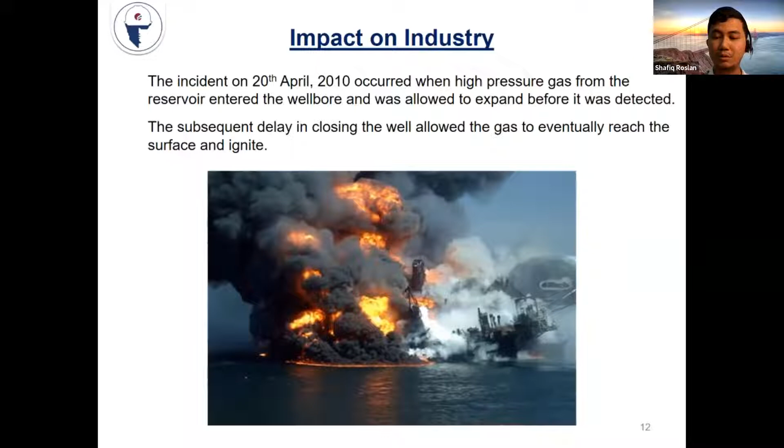So the impact of this incident, the blowout of this Deepwater Horizon well, caused loss of 11 lives, destruction of the drilling unit itself, and also uncontrolled flow of hydrocarbon into the sea. So it happened around 3 months.

So we took quite a lot of time because of the contingency plan. It needed to drill a relief well, right? So that is not a good contingency plan. As we see over here, it took around 3 months.

And it costs around 4.9 million barrels of crude spilled to the sea. So it's about a week of Malaysia's total crude production, which is about 700,000 barrels.

So it affected the name of the company itself, the operating company, and the contractor, the rig owner, as well as impacting society, for example fishermen, and the tourism industry, because the oil was now all over the beach.

So this is what happened after this incident. This is the consequence. That's why we have this kind of subject. We want to talk about well intervention, and actually what we can offer you to prevent all of this from happening.

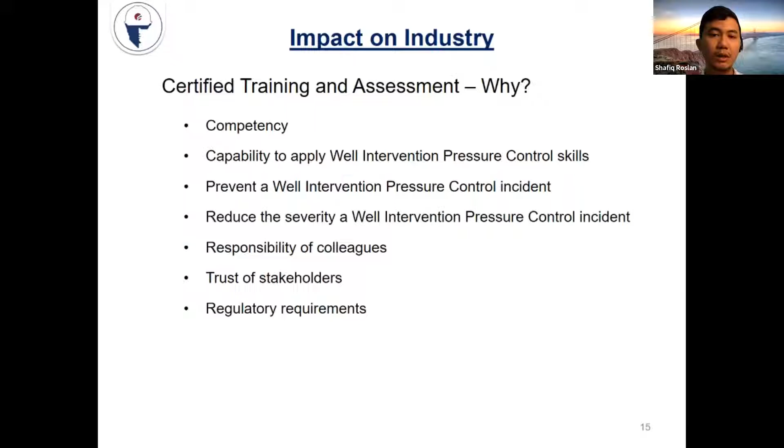Let's say if we pass this course, so we know that we can rely on him, and he also can share with the colleagues offshore, and also build trust of the stakeholders and compliance with the regulatory requirement. So let's say if there's an incident, a well control event happens, it can impact the personnel.

Loss of life, right? You can see from the previous incident at the Deepwater Horizon rig, it cost about 11 lives, injury, and also loss of employment.

So for asset, we also can have asset damage, or a total loss, disaster. Environment impact, and in the heart of our operation, we need to either suspend or just abandon the job. The name of the company itself, the name of the staff, and also the people. So this is again, we already talked about what will be the consequence.

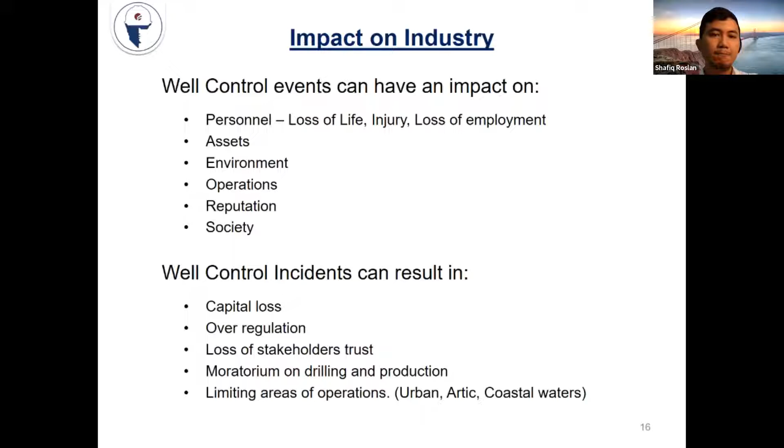So this IWCF certification - actually IWCF is an independent body. It focuses on developing and administering well control training and well intervention pressure control training, the assessment, and also certification program for the E&P sector around the world.

Following from the incident, there is a report produced by the IOGP, International Oil and Gas Producer. In report number 476, there is an introduction of two programs.

So drilling well control - this is specifically in drilling operation, exploration drilling, development drilling. And then the second one is well intervention pressure control. This is during completion, well intervention, or abandonment. Sometimes we use this conveyance.

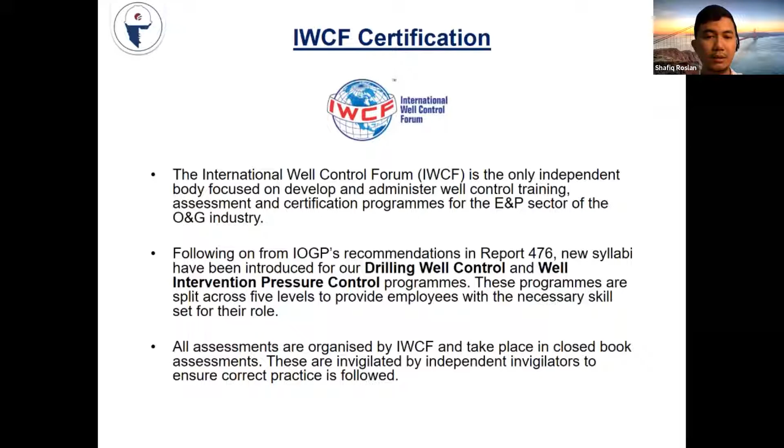This program is split into 5 levels, from level 1 until level 5, to provide employees, staff, people working within this industry. So all the assessment will be organized by the IWCF, and will take place as a closed book assessment, held in a center approved by IWCF.

So as per the IOGP report, this is the level guidance chart. There are 5 levels of the well intervention pressure control program.

Level 1 will be the introduction level - it will create awareness. So what's the training purpose? You want to create awareness of the process and terminology of the well cycle.

So I recommend, if you haven't done this, you can just log into this portal. Later I will share that link. It's actually a free course, so you can have like...

an introduction of what the process is in well operation, what the importance of well control and intervention pressure control is, the life of the well cycle, how we can contain an incident, the ERP, and the role and responsibility of each personnel. Basically we have a few modules to complete, and you also have an assessment - you need to pass around 70%, that will be the minimum marks.

All free. So this is good for a roustabout, maybe even a fresh graduate, crane operator, deck crew that are not really related to working with well control equipment or pressurized control equipment.

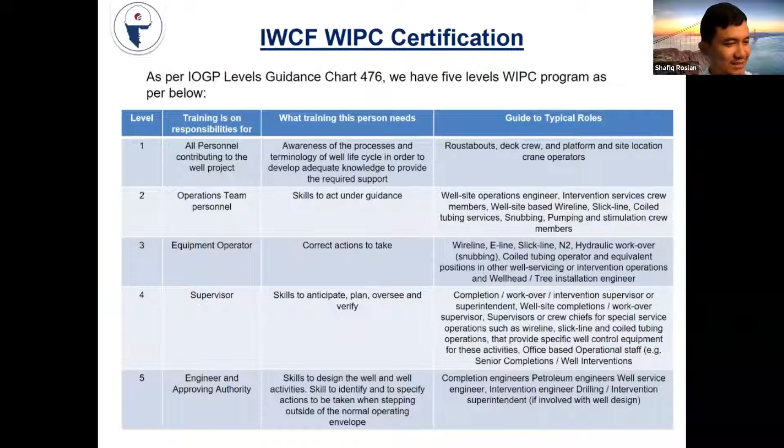Okay guys, any question about this slide? Are you all good? Can all of you hear me? All right, okay, so if no, I move to the next slide.

So why this IWCF Well Intervention Pressure Control Certification? Because this certification is a regulatory requirement from the operating company and also the oil field service company. The operating company mandates this as a requirement, so the service company needs to follow the requirement of the client - for example, if Petronas, Shell, or JX Nippon put this as a requirement inside the contract, the service company needs to follow that requirement. The equipment operator needs to have this certification.

The supervisors of the service company as well as the operating company also need to have this certification. This is a requirement to run the job or even for promotion. Let's say initially you are the operator assistant, and after a few years you have sufficient experience and your management team has confidence in you that you can run the job as an operator. So they want to promote you, but in order to get promoted, you need to have this certification. That is one example.

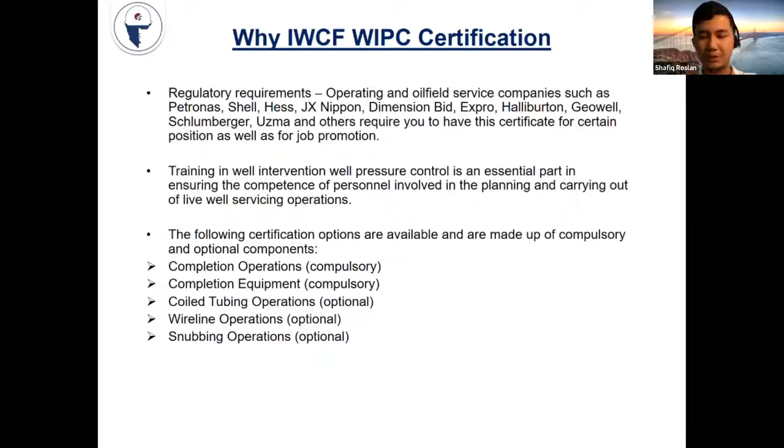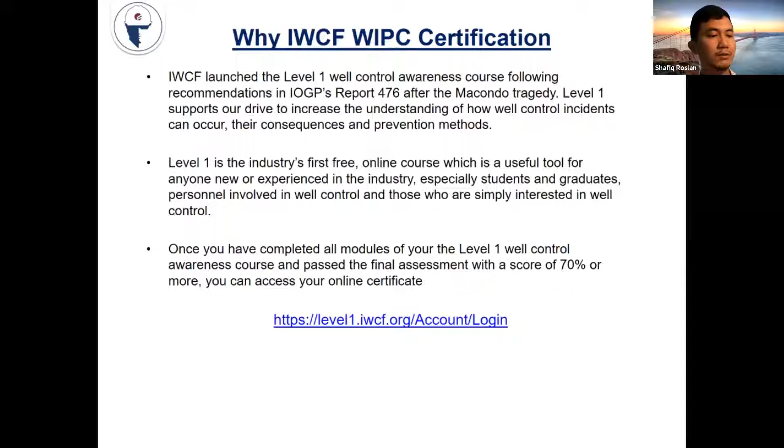So this is the link for level 1. If you haven't done this before, you can have a look, log in to this portal, and try it. This is the introduction of level 1, well control and well intervention pressure control, and you will get the certificate after you have completed this assessment in level 1.

So now we move to the next subject, introduction to well intervention. Why do we actually do well intervention? What is the purpose? Because there will be a purpose.

How can we improve the production? First we need to identify the issue, diagnose what the issue with the well is - whether it's due to an integrity problem, a mechanical problem, an obstruction, or maybe a change in reservoir behavior. Based on this diagnosis, we can overcome the problem we found.

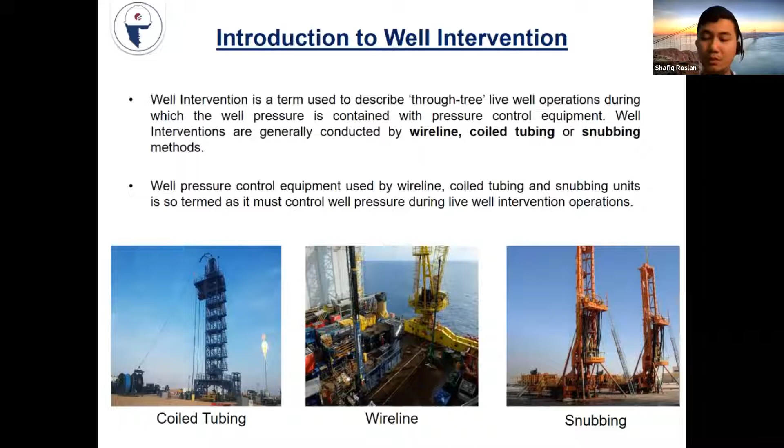Basically, wireline operation refers to the use of slick line. Later we will see the types of wire, slick line or braided wire, or even single conductor or multi-conductor, used as conveyance for the wireline operation to lower down equipment, either logging tools, mechanical devices, or measuring devices into the well.

You can see here two units: one is an E-line unit belonging to Schlumberger, and the right one is a slickline unit. This is at offshore Terengganu.

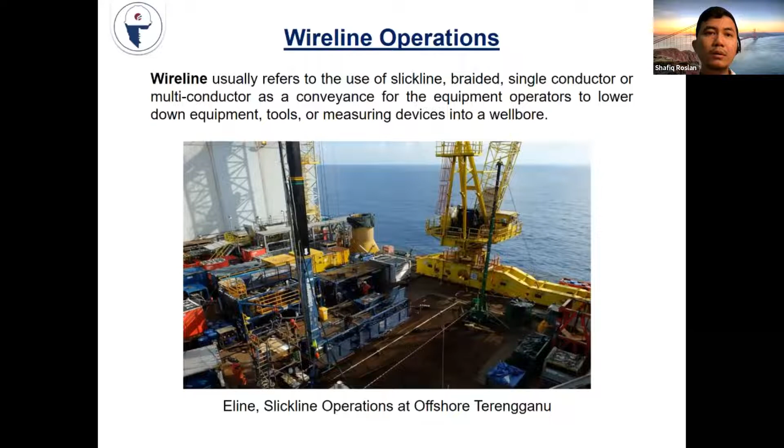So for wireline operation, I will share with you what is a wireline operation. This is a slick line operation at Netherlands, I believe. I hope it will give you a better understanding of wireline operation, because this is an introduction course, so I hope it gives you better understanding about wireline. I will share this.

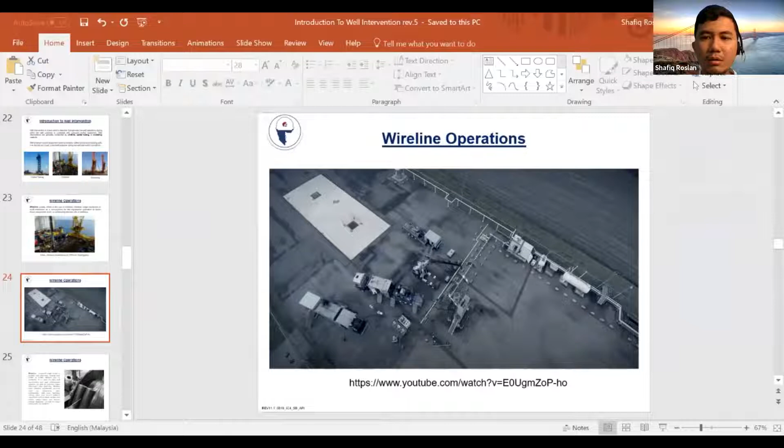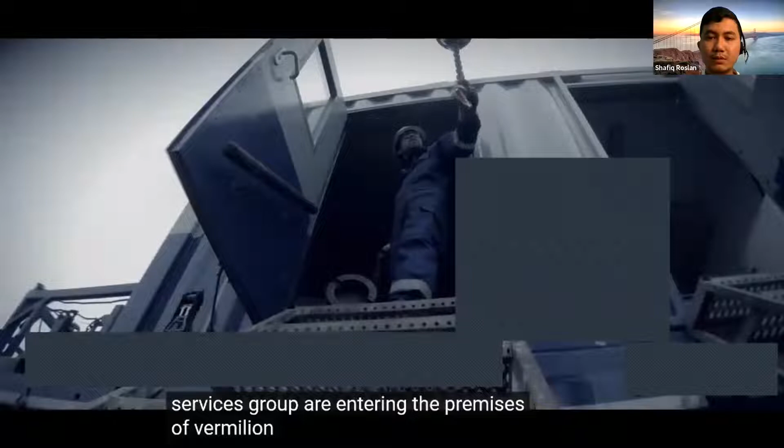It's early in the morning, somewhere in the northern part of the Netherlands. Two trucks and four crew members of the Well Services Group are entering the premises of Vermilion, a gas and oil company operating worldwide. They are here for a reason: gas production dropped down severely and nobody really knows what the problem is. That's why they are here. Just an ordinary day for some extraordinary people.

Just want to check, can you hear the sound? Daniel, can you hear the sound? Yep, yeah, loud and clear. Thanks, here is the story. Yep, okay, bye.

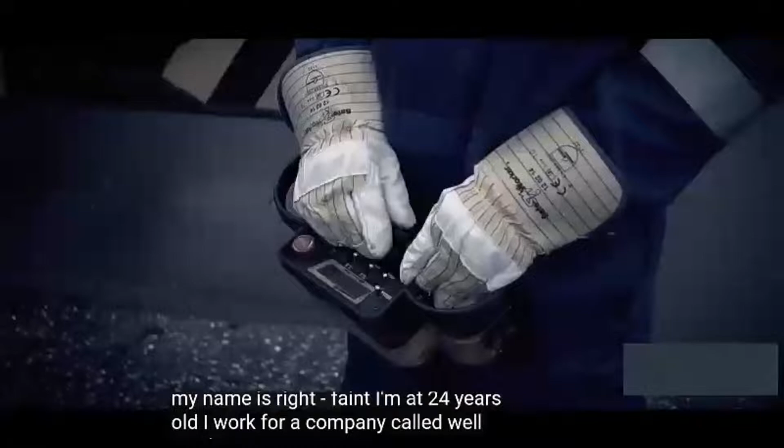My name is Fain, I'm 24 years old. I work for a company called Well Services Group. We're active in the oil and gas industry. We do clean-outs in wells. We do downhole services.

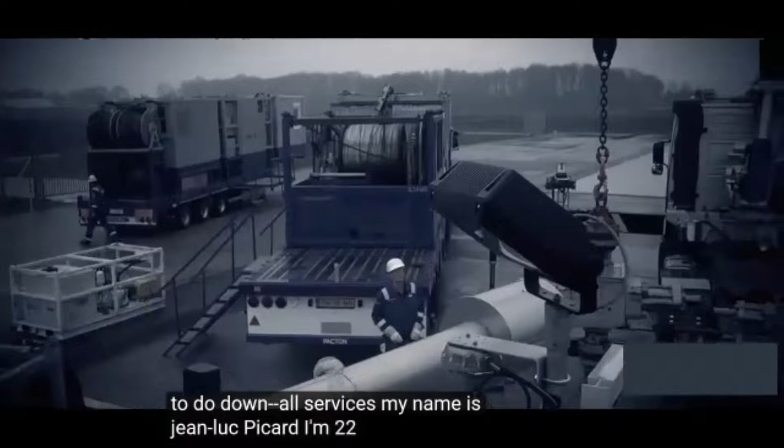My name is Sander de Kaat, I'm 22. On this job I'm a slickline supervisor. We have slickline, coil tubing, pipeline services.

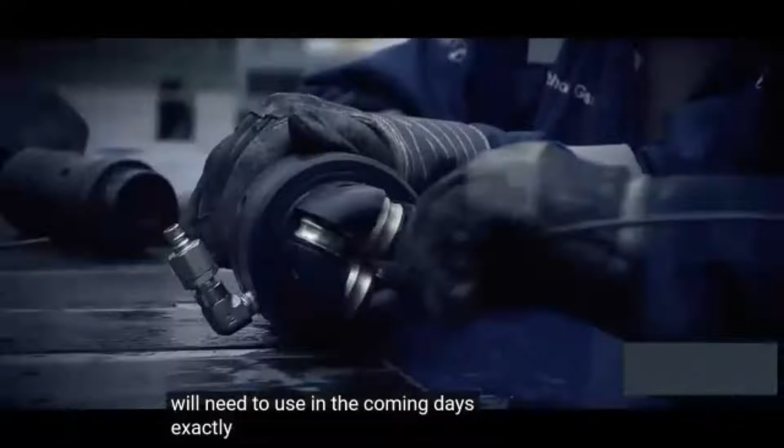Before they can start with the first part of the process, slick lining, they have to position all the equipment they will need to use in the coming days exactly in the right position. This so-called rigging is the responsibility of Roy Terveen, who is supervising this whole delicate operation. Bring the equipment exactly the way it should be, because you want to have a visual on almost everything, so that you can have a big overview, like a helicopter view.

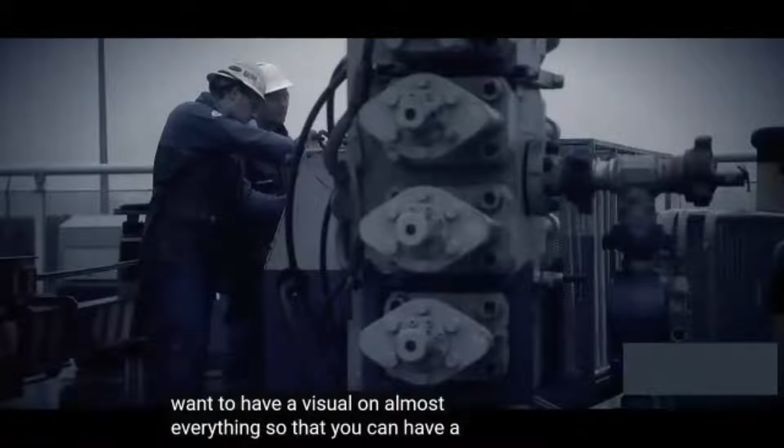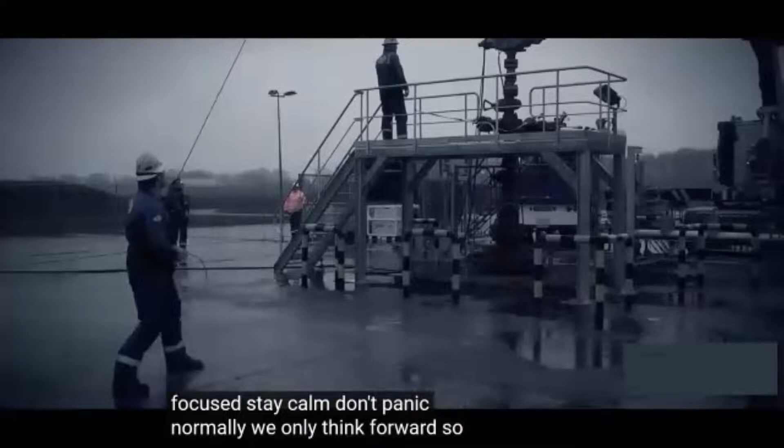The key to solving problems is always to stay focused, stay calm, don't panic. Normally we only think forward. So we see a problem, we're going to find out what it is, we're going to solve it as quick as possible for the client, and then we're going to continue with the job. This job is, in my opinion, all about teamwork. If you don't do it as a team, I don't think the job's going to happen at all.

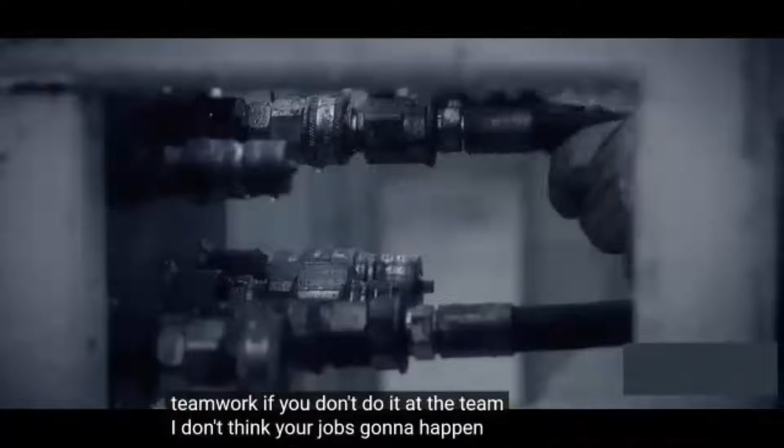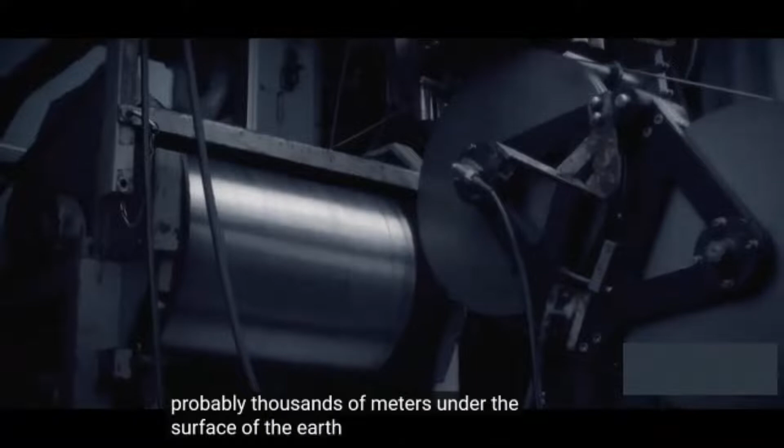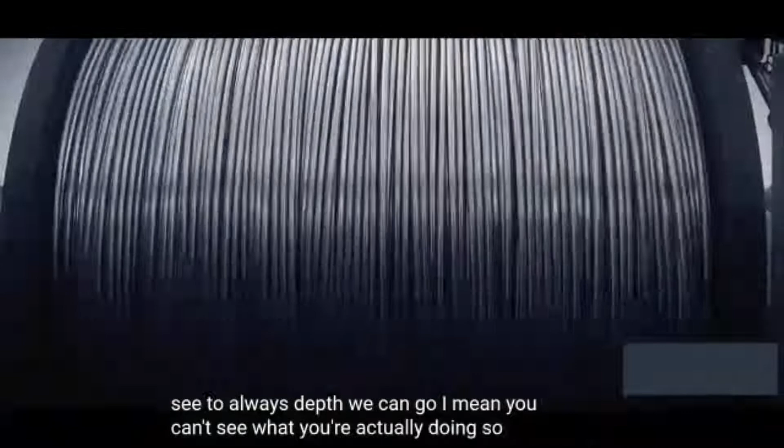Now the crew can start with the slickline to see if the problem causing the setback in production can be found. Keep in mind that this problem is probably thousands of meters under the surface of the Earth. First thing we do is pulling the safety valve. After that we go in with slickline with a drift run to see till which depth we can go. You can't see what you're actually doing, so you're always looking at your depths and your weights. It's all blind. The only thing you see is weight and depth.

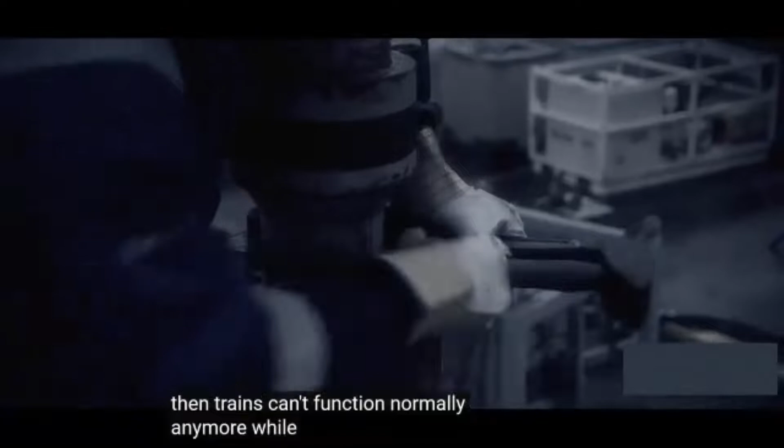Besides tackling unforeseen obstacles and staying focused on the job, there is another challenge coming up: the weather. You don't want any time loss on this job. The weather can have a big influence on it, because if you have too much wind, then cranes can't function normally anymore. We've got wind meters, and as soon as the wind picks up above a certain amount, we just have to quit, you have to stop working.

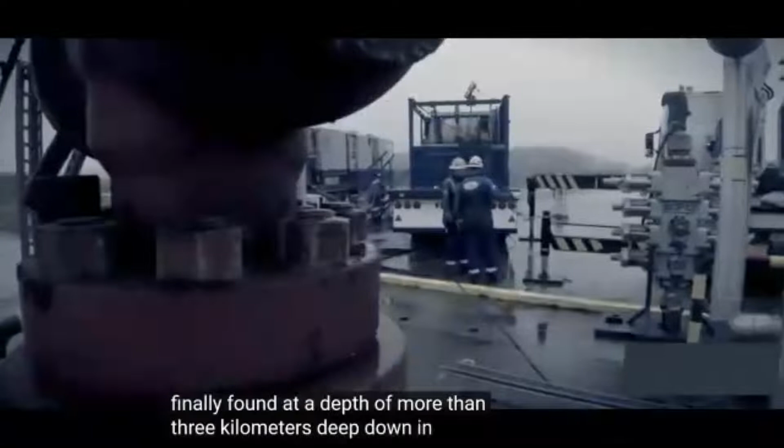Conquering wind and rain, the problem is finally found at a depth of more than 3 kilometers deep down in the ground. It's salt. The salt builds up on the side of the tubing, and that can create a problem with your production flow. The production fell back like 30%, so now it's up to us to clean it out and see if we can get it back up.

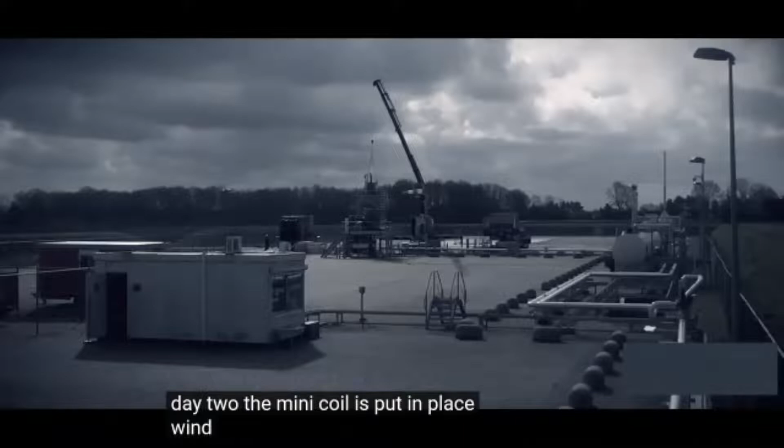Day 2. The mini coil is put in place. Wind and rain have passed, which is a good thing because the crew is on a tight schedule. The salt problem needs to be solved, and it needs to be solved today.

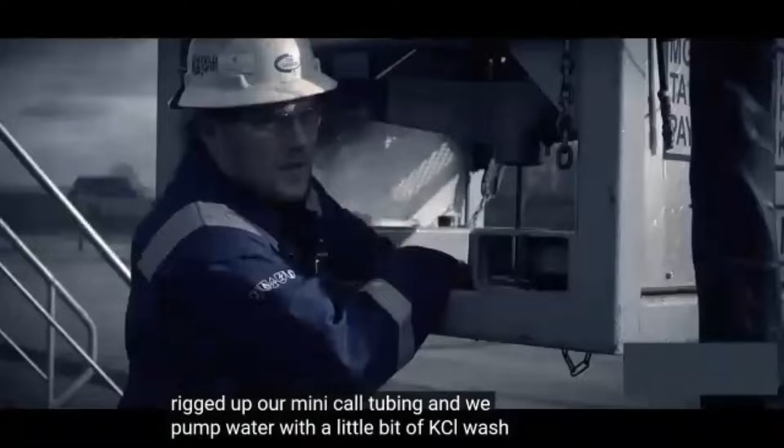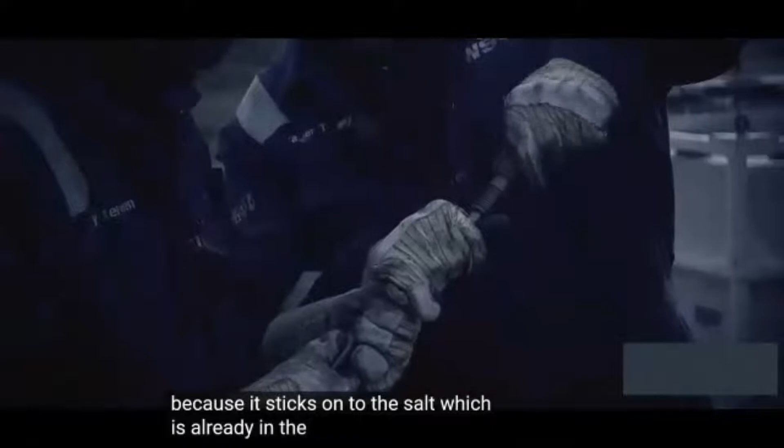More than ever, time is money. As soon as everything's on the right spot and the equipment's ready to go, we rig up our mini coil tubing. And we pump water with a little bit of KCl to wash away the salt plug. KCl water, that's a mixture of salt and water. It's easier to remove the salt in that case because it sticks onto the salt which is already in the water. The guys are working hard, keeping a constant eye on each other and trusting one another.

This is teamwork at its best, and it works slowly as the gas production is picking up. The salt problem has been solved, the production is back up to speed, so the client is happy.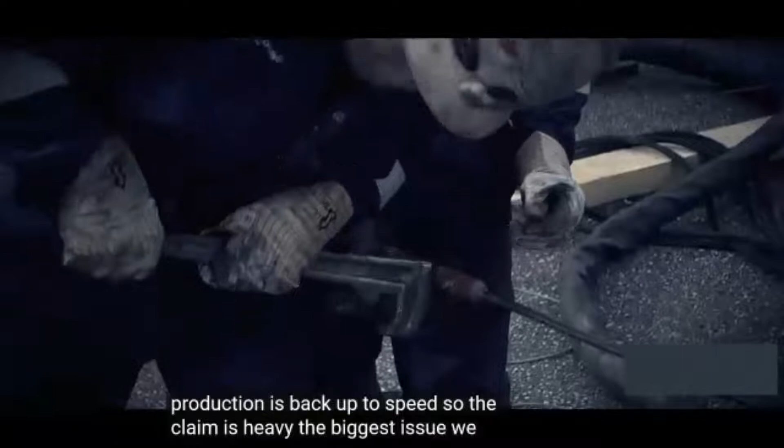The biggest issue we had was the weather, the rain. Rain is always a bummer, but it's part of the job. Every well is different. Now we're doing a salt wash, but next year it can be a completely different problem. So every day you go in and you never know what you can expect. And that's what I also like about my job, the challenge. The environment, working with the crews, everything together. It's the total picture, I think.

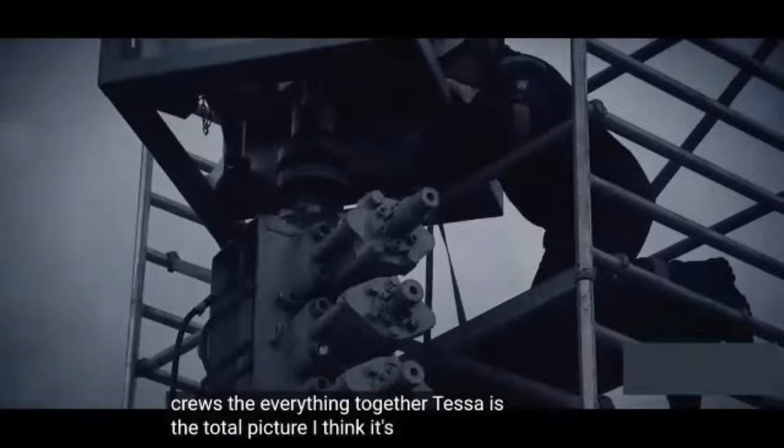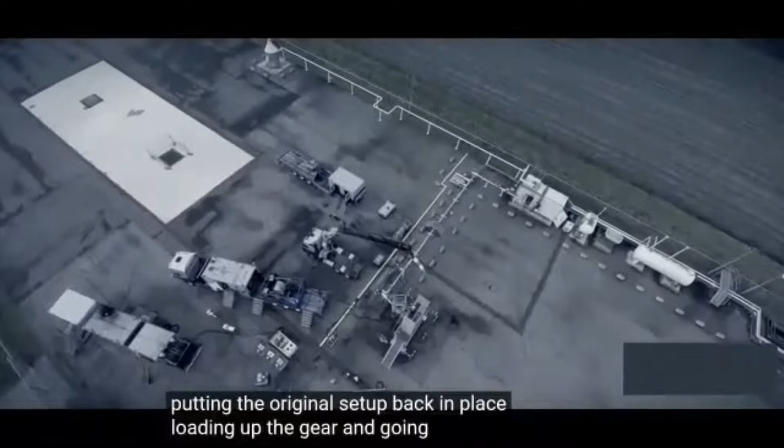Now all that is left is putting the original setup back in place, loading up the gear and going back home to prepare for another challenge on another location. But for now, a job well done.

Okay, I will share back my slide. Hold a moment. Okay, this one. Right, control. Okay, good.

So basically that is the slickline operation, right? So slickline operation is actually the initial conveyance, the early method of how this wireline operation is done, and then it evolved into similar wireline operations, but currently we have E-line technology. So inside this wire you have a conductor to transmit the signal. So we have real-time communication between surface and downhole.

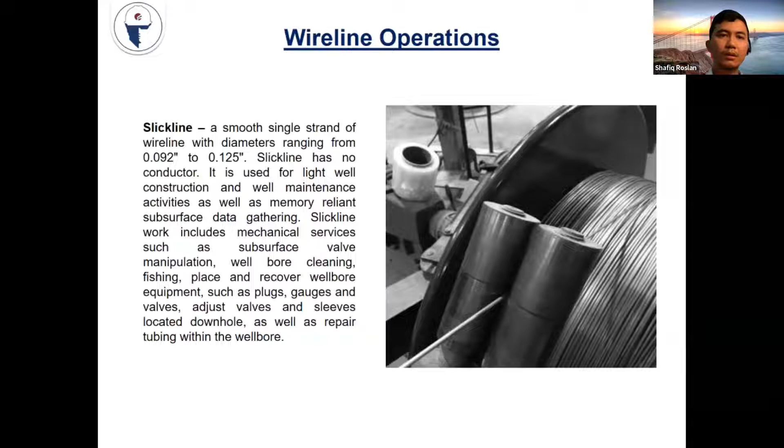Next, we talk about braided line. Braided line is a bigger wire, within a similar group with the electric wire - braided line and E-line. Because of the size, the PCE type will be similar. It's a strong braided wire line of various sizes used to retrieve tools heavier than slick line can handle. Because of the size being bigger, it has relatively higher strength. It's being used for heavy duty fishing jobs, and also for wellbore cleaning works.

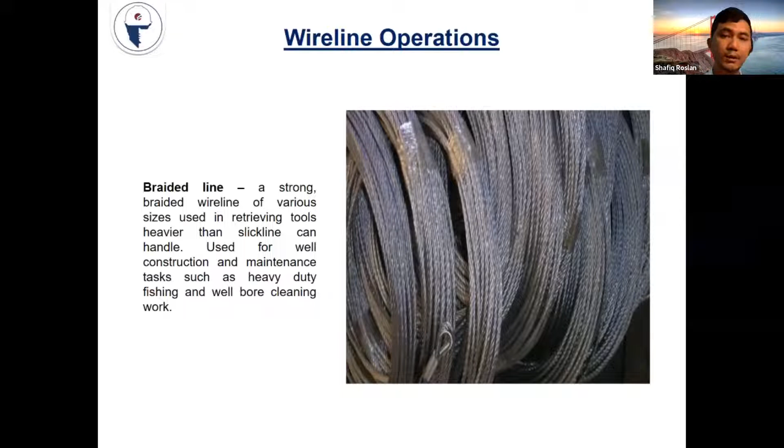Next, we move to the electric line. Electric line consists of single conductor or multi-conductor cable inside the wire. This conductor is used to transmit either power or data from the downhole, bottom hole, to the surface in real time. For single mono cable conductor, it's used for production services in cased wells because of their small cross-section area, so it's more suitable for pressure operation. Multi-conductor cable is used primarily in open hole as well as cased hole application. So basically there are three types here: slick line wire, braided wire, and electric line.

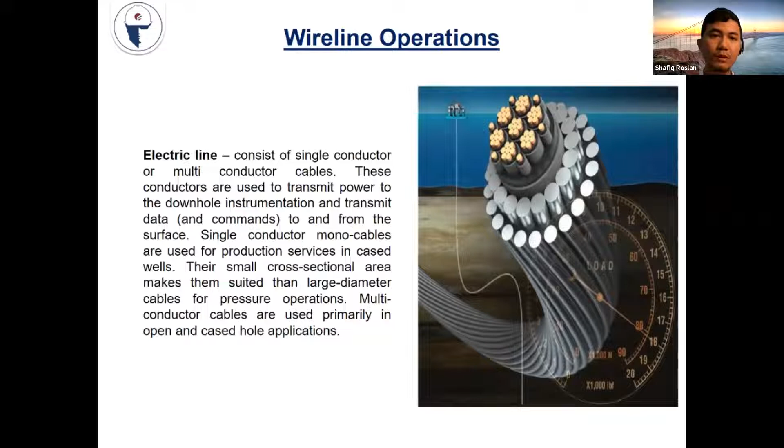So what actually can we do with wireline operation? We can basically do the mechanical completion, intervention or maintenance. For example, if our tubing retrievable TRSV safety valve fails, how can we fix that? By using wireline, slick line. For example, we can set the lock open tool in the tubing retrievable, and we can set the insert valve as a replacement for this failed downhole safety valve.

We can also do perforation, production logging, because if you want to know the behavior of our reservoir - for the interpretation from the engineering side, for example petrophysicists, reservoir engineers, they need to have this data, which they can get during logging activities. So we can do that by wireline.

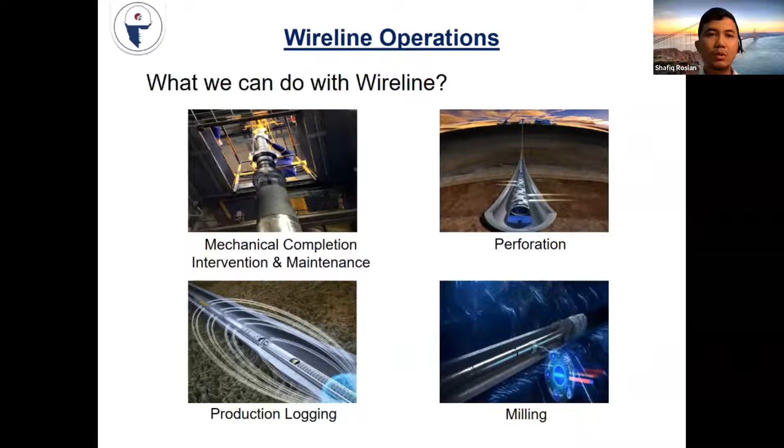And let's say if there's an obstruction, we can use wireline to mill that obstruction. For E-line, we can provide extra power to operate the motor, and also do logging to check the integrity of the well, for example cement evaluation - what's the current condition of this cement bond. Also pipe recovery - let's say we have a stuck pipe, so we can cut the pipe using this wireline conveyance, running the jet cutter RCT tool.

We use that tool to cut the stuck pipe to recover the free part of this pipe. We can also use this wireline for fishing - let's say if there's a loss of tool inside the well, we can grab it back by using wireline. We have a few selection types of fishing tools you can choose based on the application, so the fisherman will determine that, and we can fish using wireline conveyance. Also leak detection tools - this is more on the integrity of our well.

So this is an example - not all examples that I can share with you of what activities we can do with wireline. Basically, this is an introduction of the PCE equipment with wireline. So in the course for level 3 and level 4, you will review this together with the instructor in detail - what is the PCE equipment, and let's say if there's a scenario, they give you a scenario of what action you need to take.

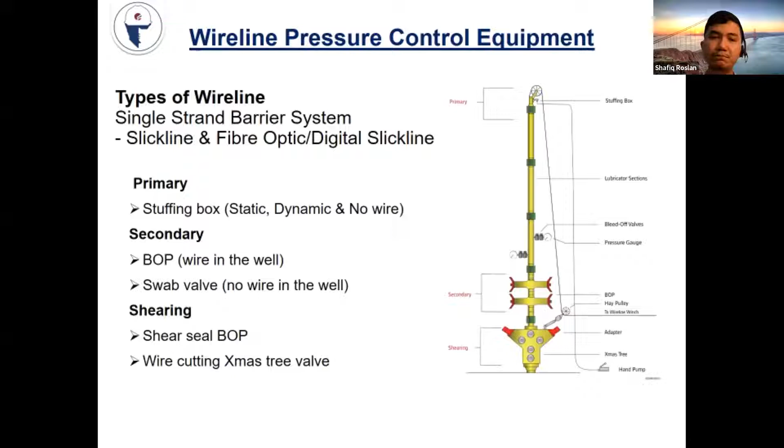For the multi-strand barrier system, this one is for braided and electric line. That's why I introduced you to the type of wire first before we move to this. Because the size is slightly bigger compared to the slick line, the PCE equipment, the pressure control equipment, will also be slightly different.

If there is static wire or dynamic, the wire is moving. If there is no wire, the prime barrier will be for static hydraulic pack off. If the wire is not moving versus if the wire is moving, the grease injection head over here will be the primary barrier. So it's not like our stuffing box.

It can be both, but this one is different. Also, if there is no wire, let's say the wire parted in the middle of operation, our ball will be pushed by the well bore pressure, and it will seal our check valve. So that will be the prime barrier when the wire is parted, no wire over there.

For the secondary barrier, it will be the dual inverted BOP. There are two BOPs over here, and each BOP has two rams - a normal and an inverted ram. The normal ram will hold the pressure from below, and the inverted ram will hold pressure from above. So we'll inject grease in between this normal and inverted ram, and do the pressure test at least 1.2 times the anticipated well pressure. The grease itself is basically the barrier - you see there's two grease, which means we have two barriers.

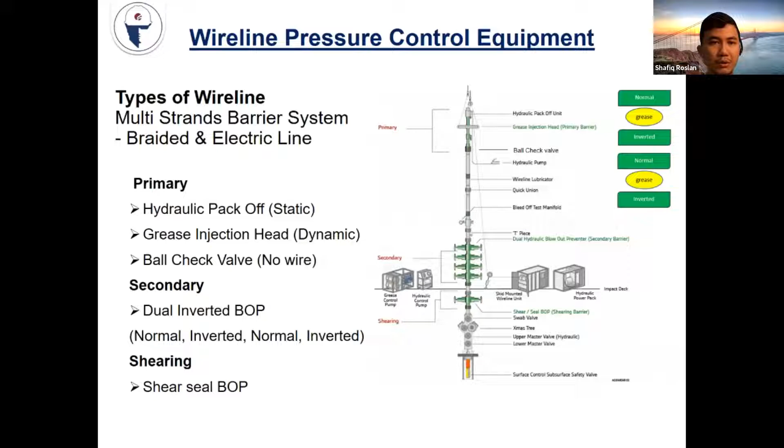So if we have the wire lost in the well, we need to fish it. This is the example after the wire has been fished to surface. So this is roustabout - you need to do the housekeeping, cut the wire by using the cutting torch, and do housekeeping before you can proceed with the next fishing plan. This is an example of it, this is on the rig.

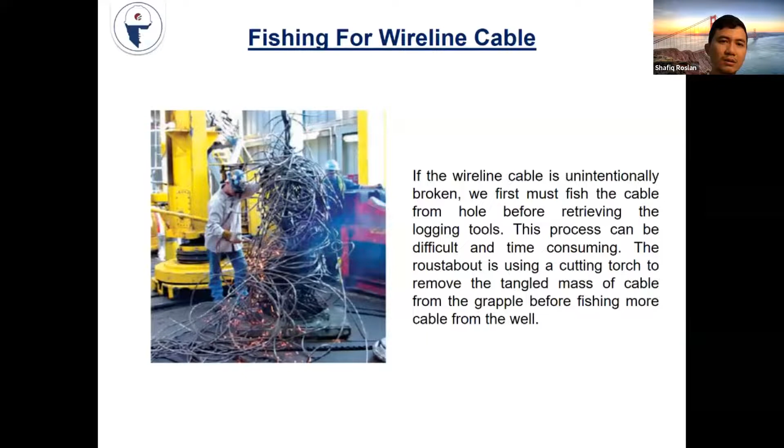Okay, next we move to coil tubing operation. So this is the coil tubing unit. Coil tubing is actually a long continuous metal pipe that is wound around a large reel - this is the reel, and the coil tubing is wound around this large reel.

So this will be a conveyance for well repair and workover activity. We will see later what activities we can do with coil tubing. Its advantage over wireline is the ability of this equipment to be pumped through - the coil is like a pipe, and inside the pipe there's a hole, so we can pump chemical fluid inside the coil.

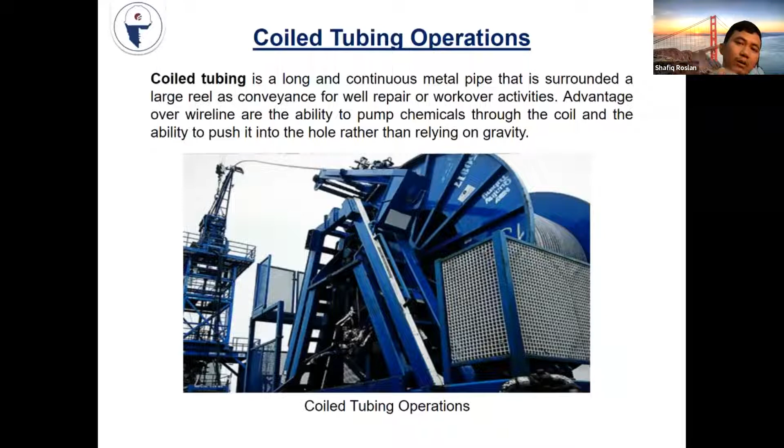For example, if you want stimulation activity, we can pump stimulation fluid, acid, for example matrix acidizing to frac or stimulate the formation, or even if we want to frac the formation, we can use the coil tubing. It's also independent from gravity - it's not heavily dependent on gravity because it's a kind of rigid material compared to wire, so we can relatively push it to overcome obstruction.

So this is the coil tubing operation. The equipment is big compared to wireline - you can see over there the CT reels, the jack-up frame, the towers, a nitrogen unit, a separator. So we need to have a kind of larger deck space. That's why one company, X-Pro, introduced coil hose. This equipment can provide a kind of similar service like coil tubing, but with a small footprint.

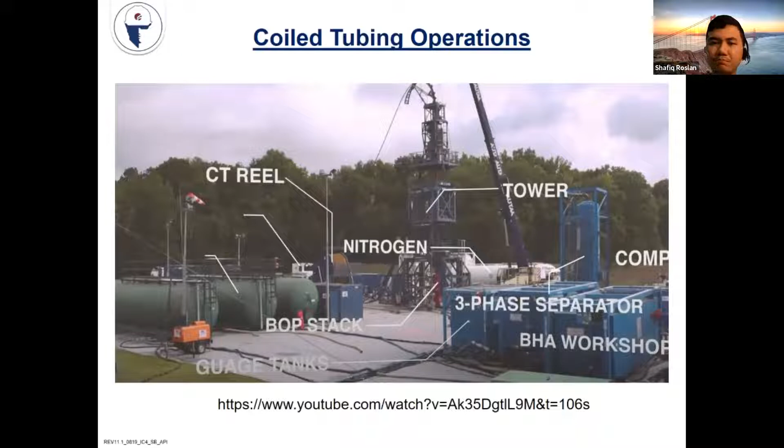So yeah, this is a coil tubing operation. This is a video of it - let me show you this. I hope the video is moving.

Okay, that will be the reel, and this is the guide arc, the gooseneck, and this is the injector. It will inject if the pipe is light, meaning the well force is higher than the weight of the pipe. It will snub using this injector. Let's say if this pipe is heavier, so it will hold the pipe in position to prevent the pipe from running away into the well. So this is at offshore Terengganu, Tapis Charlie.

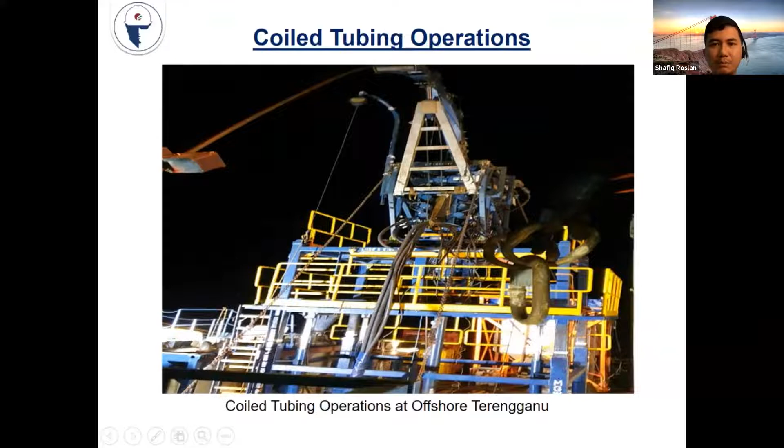So what actually we can do with coil tubing, we can improve the oil production from existing wells by installing this velocity string. Velocity string actually we kind of install a smaller diameter production string using this coil tubing, and of course, if we reduce the cross sectional area of the tubing, we will have a higher velocity flow of gas. So this gas we transport together with the liquid to surface.

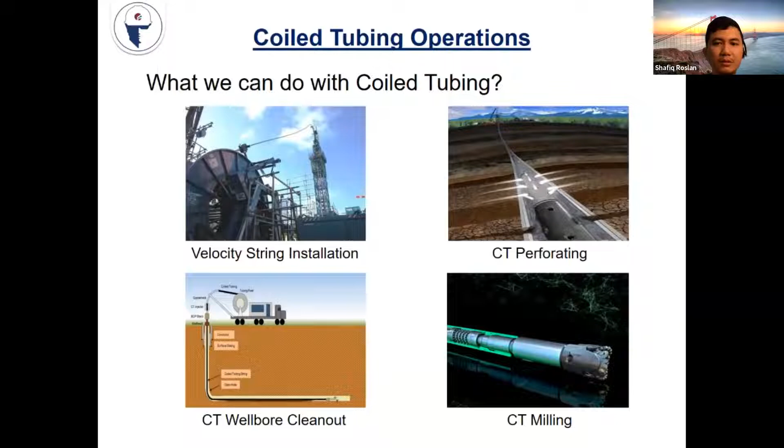And then by using this conveyance, we can do perforation, similar to wireline. We can do coil tubing wellbore clean out. This cannot be done with wireline. So we can use tools like a blaster to clean the well from sand, circulate the sand out from the well to clean the well and revive back the production. We can use it for milling, mill a stuck fish for example. If there's an obstruction that we think we cannot fish out, we can mill it slowly.

If we want to artificial lift to kick off the production, we can inject nitrogen, because the density of this nitrogen is lighter, it's a gas compared to other fluid. We can artificial lift our kill fluid, for example, or also our hydrocarbon. We also can use this as a drilling equipment. So we have this current technology, I use this motor to drill a new section of well.

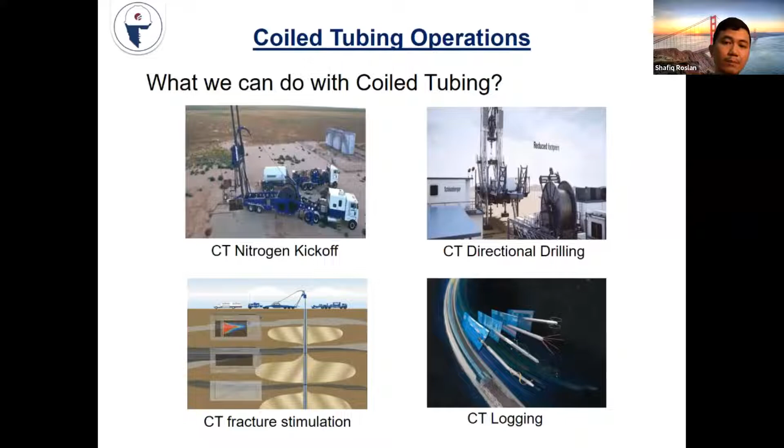We also can use it as fracture stimulation. You can frac the formation, we use the proppant to ensure that the formation's permeability, the communication, is kept open. We can frac the formation, and as well you can do the logging job. We can check the integrity of the well, the behavior of the formation, formation evaluation, similar to wireline logging.

But it's got an advantage because we can push it from surface since it's a rigid pipe. Compared to wireline, we need to use a tractor. So tractor, let's say if you have an issue with angle, with gravity, the angle of the well, you can use this equipment as a motorized roller to guide a wireline to be moved inside the well.

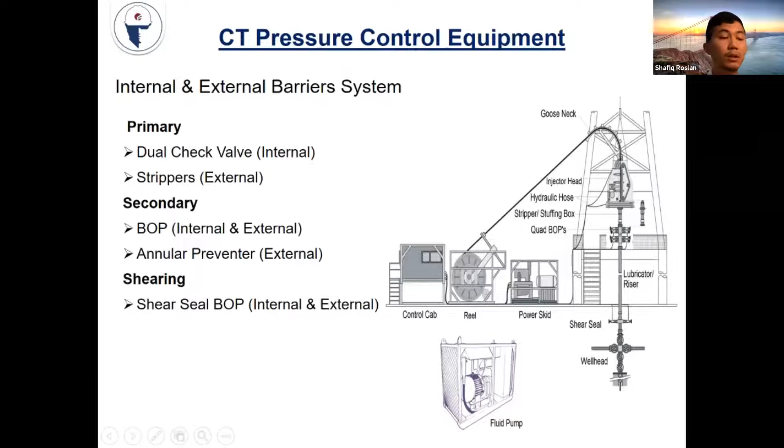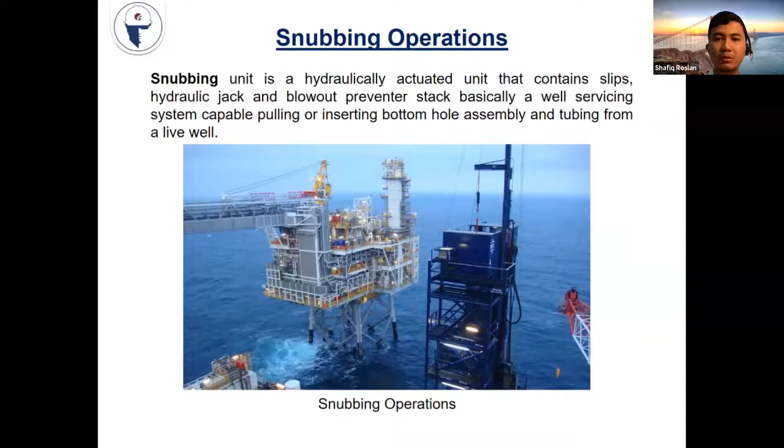All right guys, so the last one will be the snubbing operation. Snubbing unit basically is a hydraulically actuated unit that contains slips. So there's a 4 slip, a moving slip and also a stationary slip for each pipe condition - heavy and light pipe. There's a hydraulic jack and blowout preventer stack, a well servicing system is capable of pulling and inserting our string from a live well, hydraulic workover, right? So we working on well, we do completion while the well is still live.

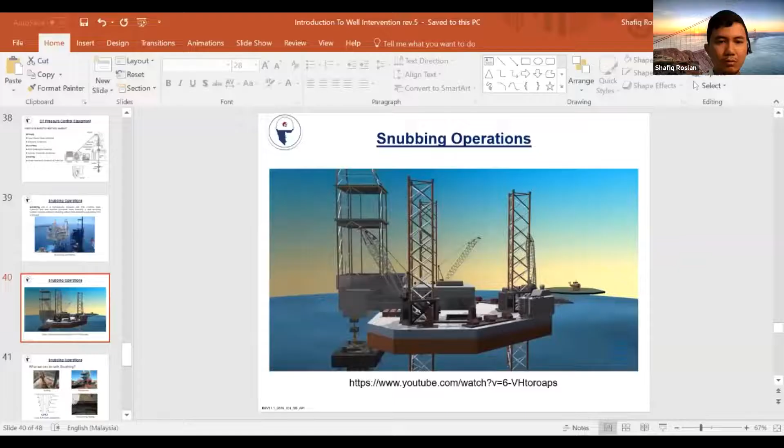So basically I will share with you about the snubbing unit, what actually a snubbing unit looks like.

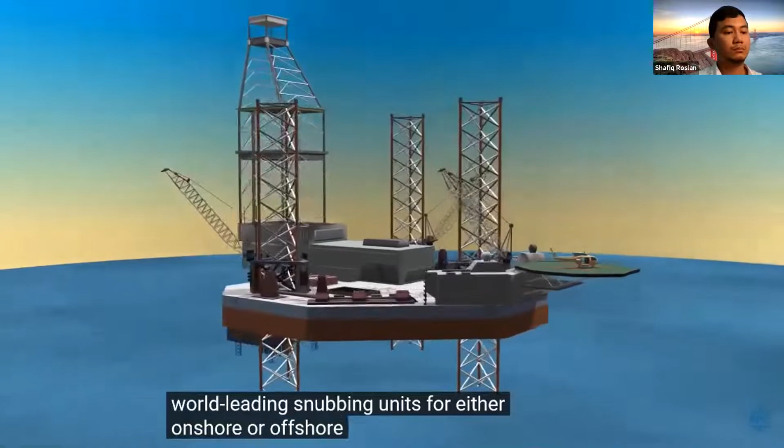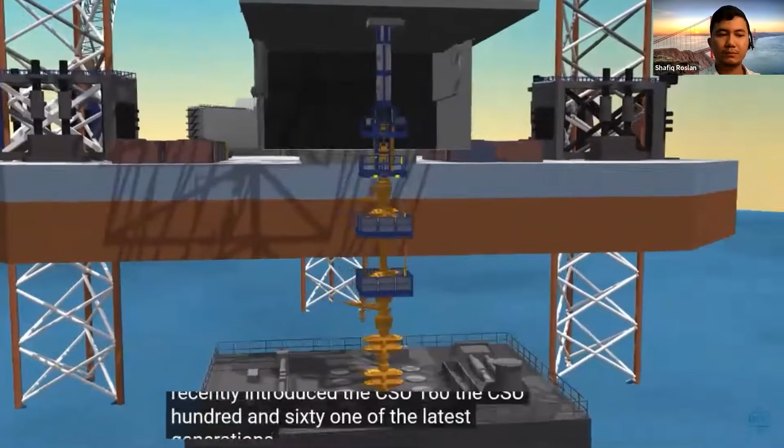So this is snubbing unit, right? Balance Point Control creates world-leading snubbing units for either onshore or offshore operations and has recently introduced the CSU 160. The CSU 160, one of the latest generations of rig-integrated snubbing units, combines safety and efficiency on board of conventional and automated jack-up rigs.

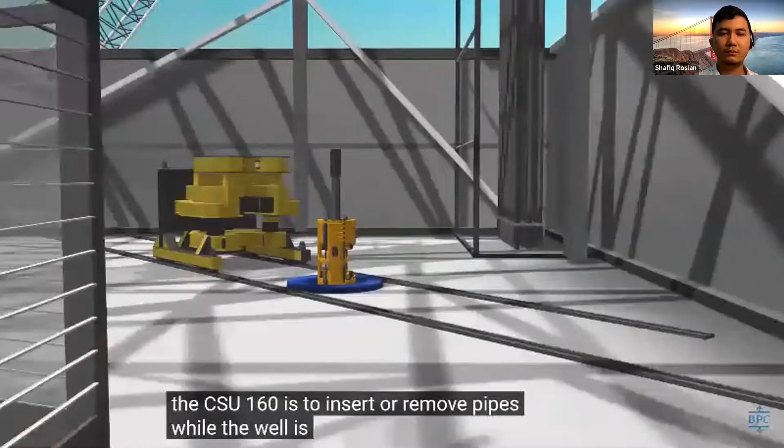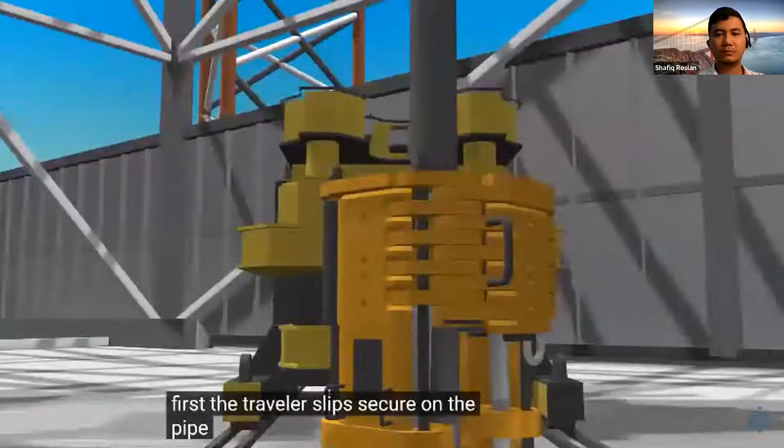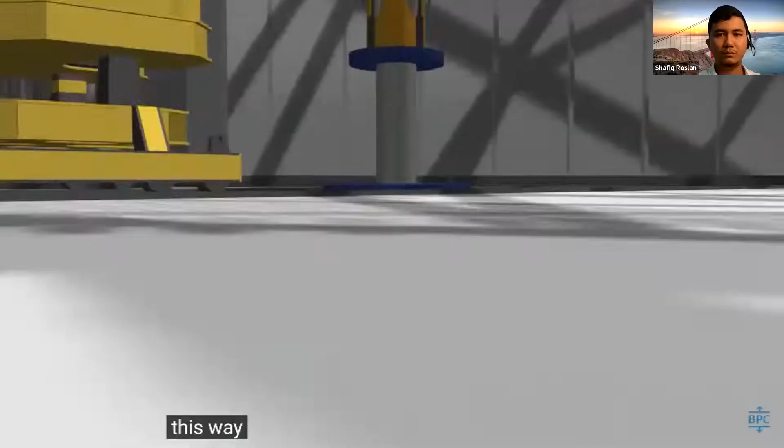The function of the CSU 160 is to insert or remove pipes while the well is under pressure. First, the traveller slips secure on the pipe. The pipe is moved using a hydraulic jack. Next, the stationary slips secure on the pipe, holding it firmly in place. This way, the traveller slips can release the pipe, allowing the jack-up to reposition.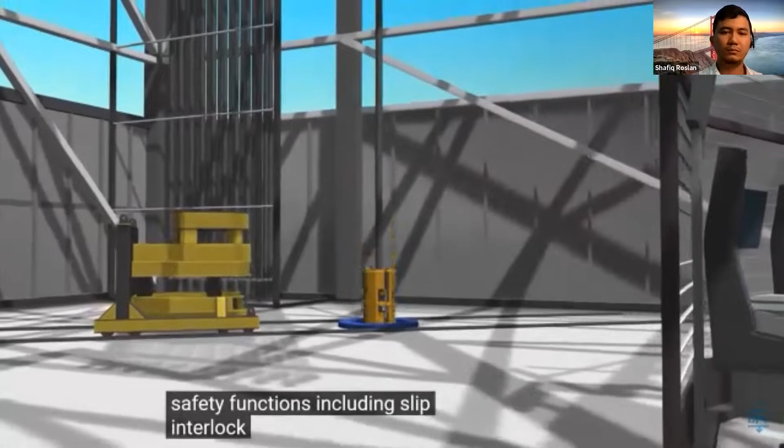The unit is remote controlled and the software includes multiple safety functions, including slip interlock. Vertical movement can be compensated by the pre-tensioning system.

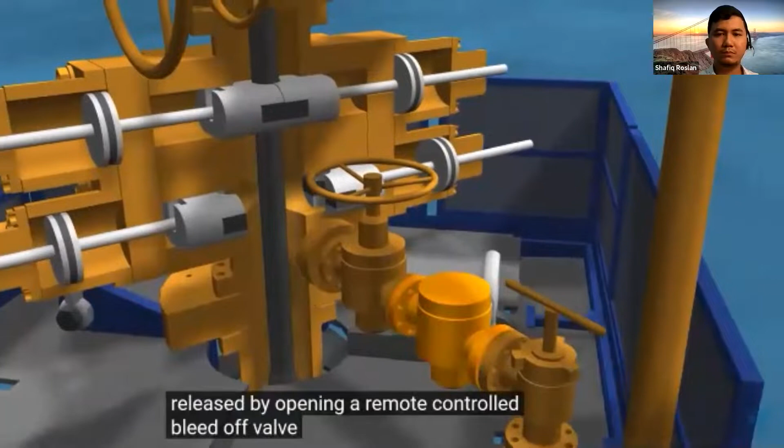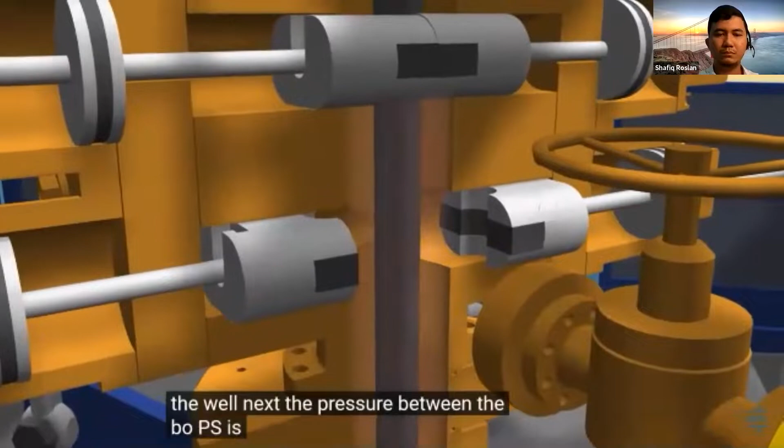The well pressure is controlled by using 2 stripper BOPs. After a tool joint passes, the BOP closes, containing the pressure below. Pressure between the upper and lower stripper BOP is released by opening a remote-controlled bleed-off valve. The upper BOP is opened and the tool joint can be pulled out of the well. Next, the pressure between the BOPs is equalized again. With equal pressure, the bottom BOP can be opened again, allowing the next tool joint to be stripped out.

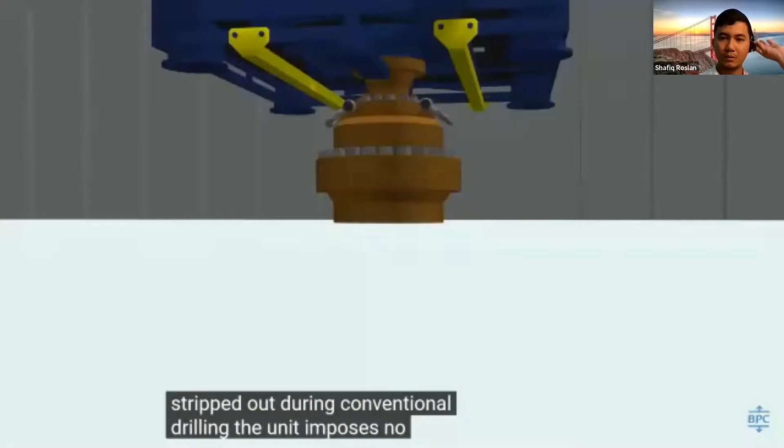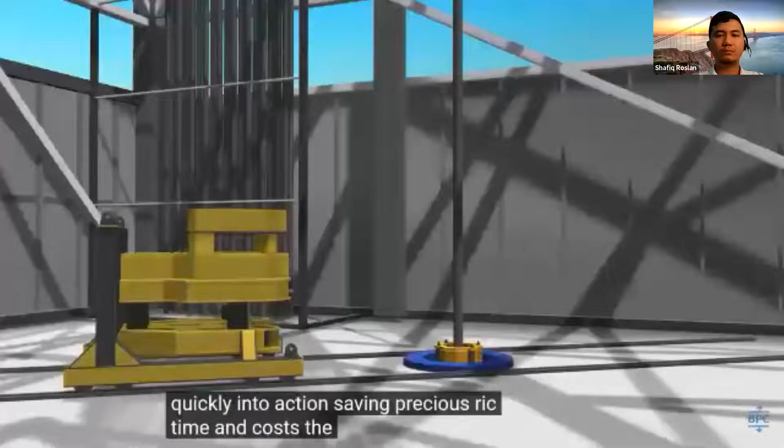During conventional drilling, the unit imposes no restrictions. A full through-bore opening is maintained by rotating the slips away from the well center. When pressurized well conditions occur, the unit moves quickly into action, saving precious rig time and costs. The CSU 160 easily takes over control of the pipe with no time lost. The existing pipe handling of the jackup rig can be used to manage the pipe.

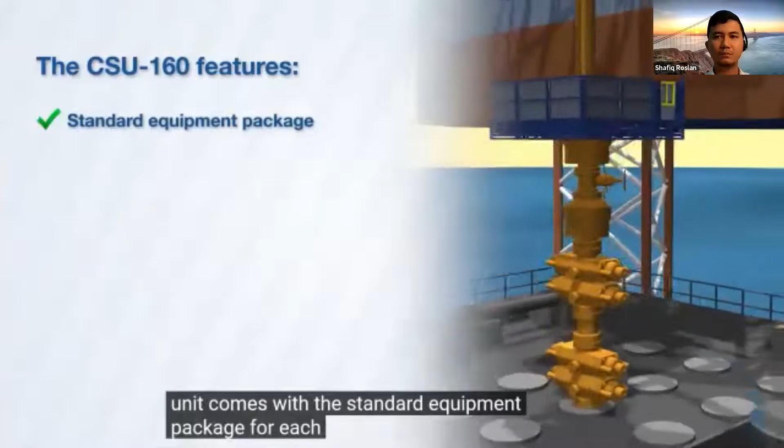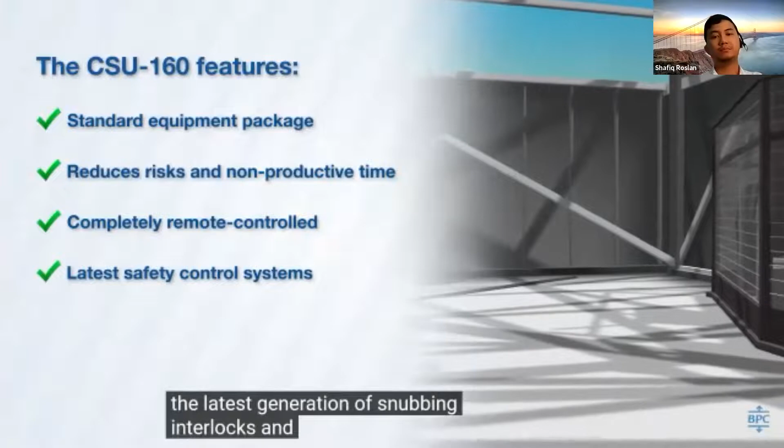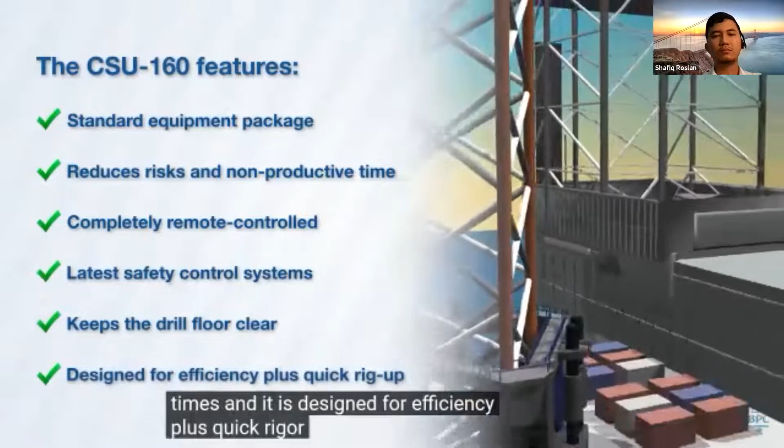To summarize, the CSU 160 Rig Assist Snubbing Unit comes with the standard equipment package for each jackup drilling underbalanced wells. It reduces risks and non-productive time by quickly responding to changing well conditions. It is completely remote controlled from the driller's cabin and requires less personnel to operate it. It incorporates the latest generation of snubbing interlocks and safety control systems. It keeps the drill floor clear at all times, and it is designed for efficiency plus quick rig up. At Balance Point Control, we pride ourselves on our expertise, experience, engineering support, and persistent push to achieve the optimal solution.

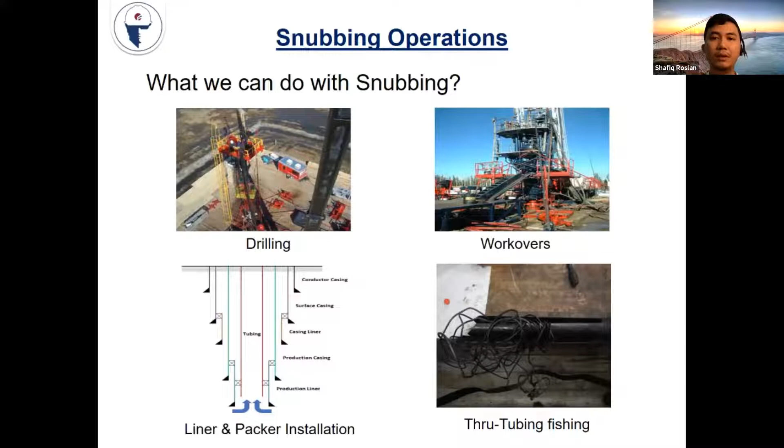You use this milling tool to mill any obstruction, a physical metal obstruction, and we can just mill it out. So these are a few examples of what we can do with a snubbing unit. There's a lot of things we can actually do with this conveyance, but this is an example of it.

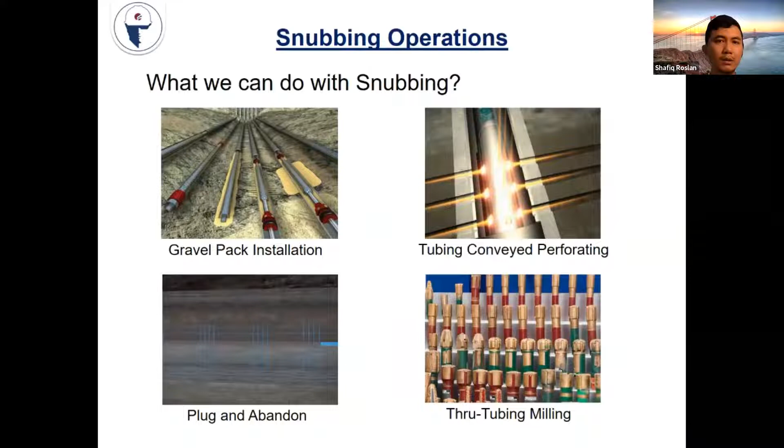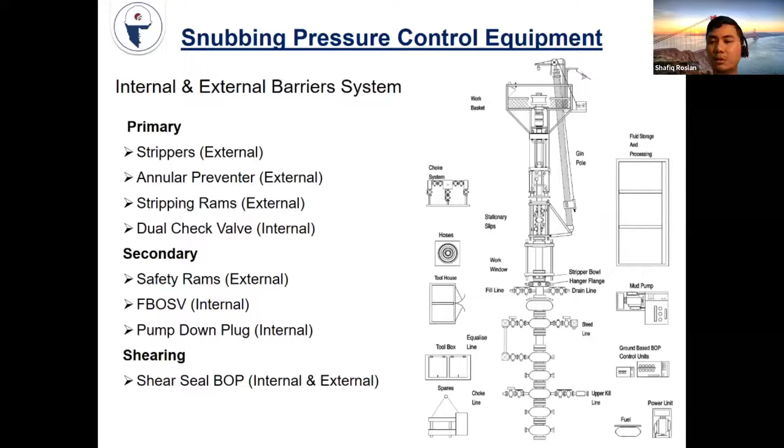So basically that is the overview of well intervention introduction - the types of conveyance, the activities we can do with each conveyance, and the pressure control equipment for each conveyance, with primary, secondary, and shearing barriers. And this is now the topic of discussion about career in well intervention.

There's a lot of existing wells, and operating companies every year try to optimize and maximize the rate of production, or either maximize production or leave the site, just sell it off to other people. I mean to say that in order to stay in the business, you need to at least maintain or improve the production rate of your existing asset. That's why I must say well intervention has a bright future.